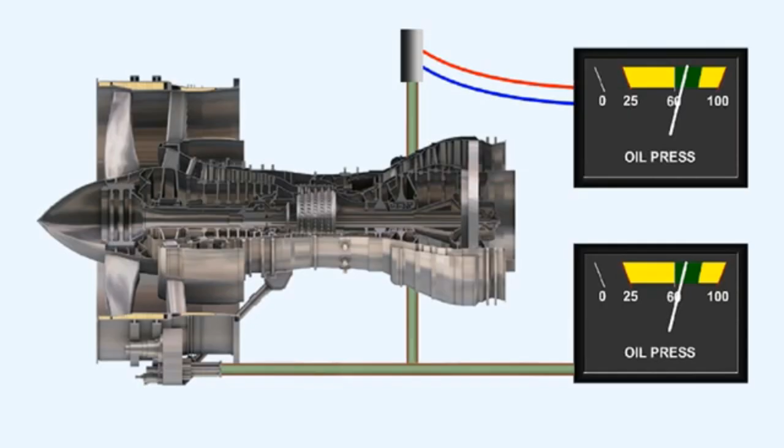A remote indicating system uses a remotely positioned sensing element which is connected to the pressure source. The sensing element translates the actual pressure reading into an electrical signal, then sends the signal via electrical wiring from its remote position to an instrument in the cockpit.

A direct reading pressure instrument is physically connected to the source of the pressure that it's sensing. For instance, a direct reading engine oil pressure gauge will be connected via an oil pressure pipeline directly to the engine, to the point where the oil pressure is to be measured.

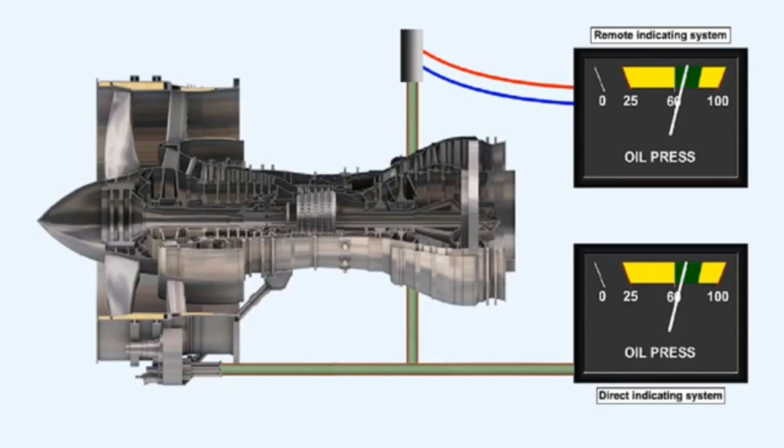Coloured arcs of green, amber or red are used to indicate the range and limits of the pressure system.

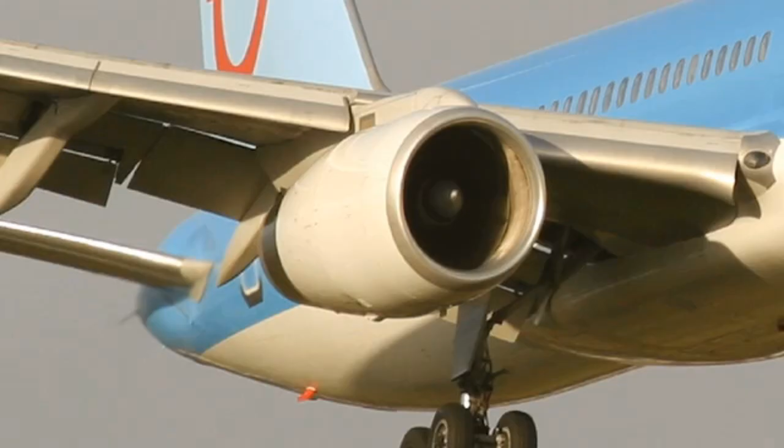Vibration monitoring equipment is fitted to almost all commercial jet engine aircraft. Although gas turbine engines have an extremely low vibration level, any change in that level is usually indicative of damage which may lead to failure.

Warnings will be given in the cockpit if the vibration levels are exceeded, and some systems have a continuous readout of vibration levels.

Modern engines have the facility whereby the vibration level of each rotating assembly can be monitored, so that the source of any vibration can be pinpointed.

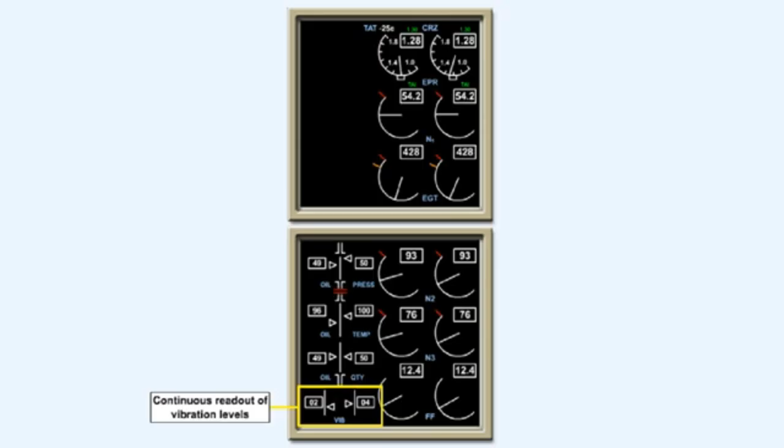The principle upon which vibration monitoring equipment works requires an input from a detector, which can be either a piezoelectrical crystal mounted strategically on the engine, or a fixed coil carrying 115 volts at 400 Hz, the output of which will be affected by the movement of a magnet within it, which is mounted on springs.

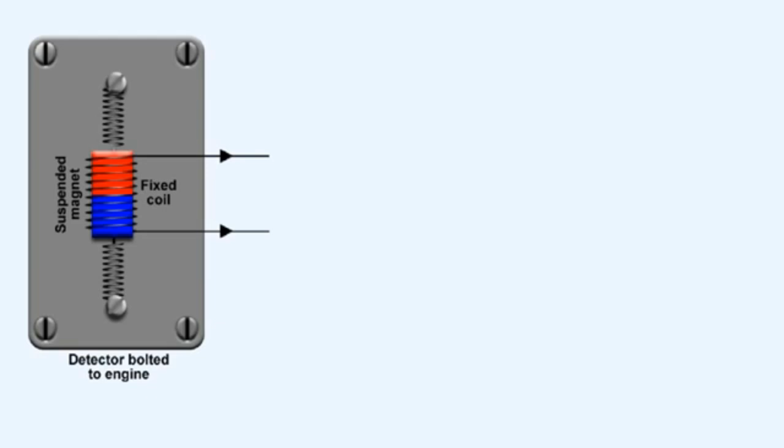In either case, the frequency of the incoming vibrations will be amplified, and then filtered so that only those frequencies that are indicative of damage occurring to the engine will affect the output.

The output of the detector will affect the current flowing through the coil into the amplifier and filter. The filter will erase any output which is normal to the engine, but allow through to the amplifier any frequency that's considered to be harmful to the engine.

The result of this amplification is sent to the instrument via the rectifier and warning circuit. The needle will show the appropriate deflection for the amount of vibration being suffered by the engine at that time.

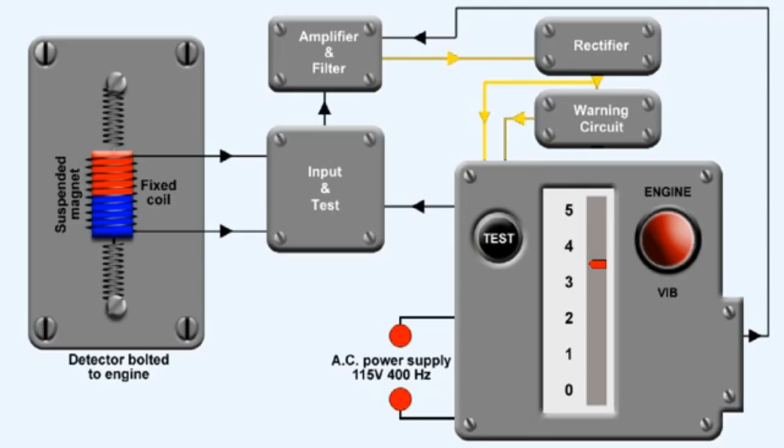If the level of vibration exceeds a predetermined amount, a warning light on the instrument illuminates. Vibration is measured and displayed in relative amplitude.

There are two methods of indicating the quantity of fuel carried in an aircraft. Either the volume, for example gallons, or the mass, kilograms or pounds, are measured.

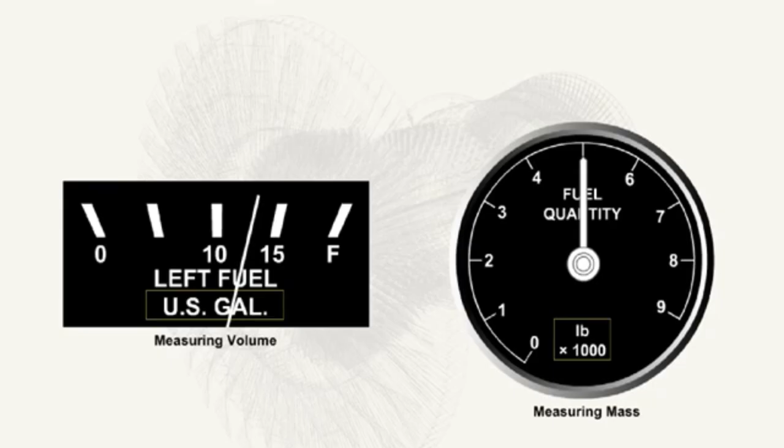Because the mass of the fuel on board is of more interest to the pilot of a large aircraft than is the volume of the fuel on board, measurement of the volume of fuel is now only used on light aircraft.

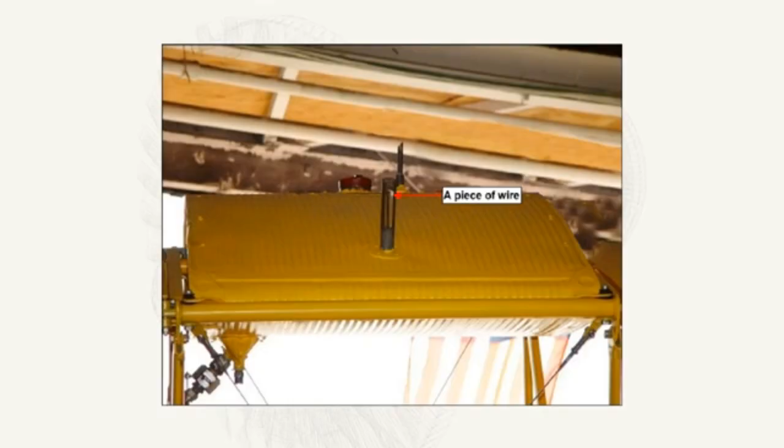The simplest form of volume indication is a float system. Early aircraft used a float which sat on the surface of the fuel in the tank. Attached to the float was a piece of wire that protruded out of the top of the fuel tank. As the fuel level reduced, so the wire disappeared from view.

A later system used the float to reposition a wiper on a variable resistor. This varied the current flowing to an indicator which had a pointer that moved over a scale calibrated in volume. The system was powered by direct current.

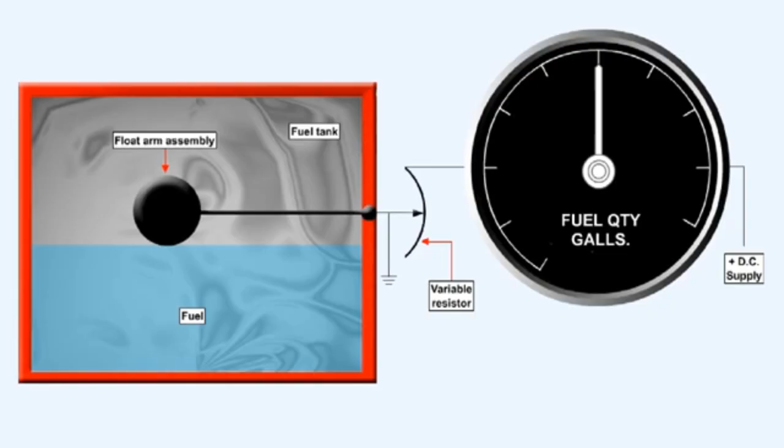The disadvantage of the float system is that the indication is not linear, and there is no provision for making adjustments for system accuracy. The gauge is set to be accurate at the low and empty positions.

The system is also subject to errors caused by temperature changes, aircraft attitude changes, and aircraft acceleration.

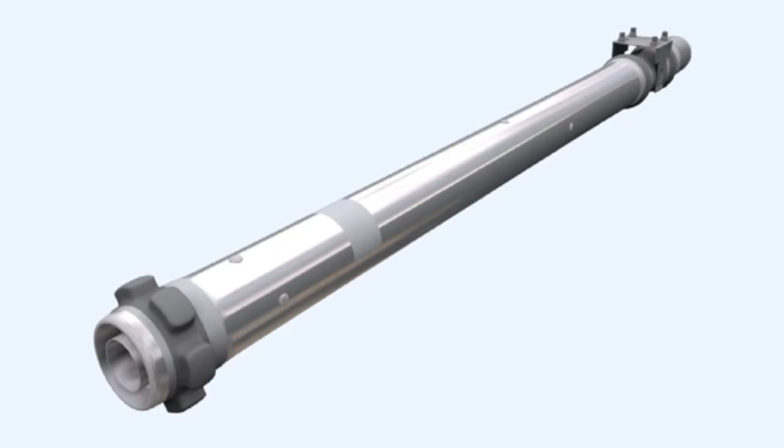In its basic form, a capacitance system, which is much more accurate than the float system, consists of a tank unit, which is effectively a variable capacitor, located in the fuel tank, together with an amplifier and an indicator.

A tank unit consists of two concentric aluminium alloyed tubes which are held apart by pairs of insulating pins. The coaxial electrical connections are insulated and the unit is insulated from the tank.

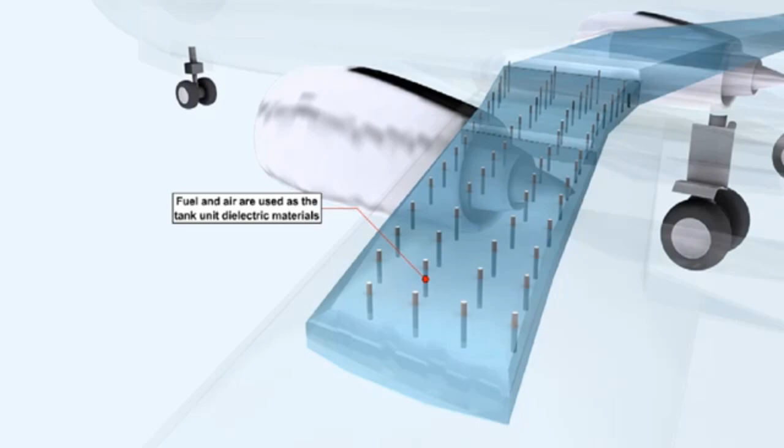The principle of operation of the capacitance system is based on the use of fuel and air as the dielectric between parallel plate capacitors, which have a fixed area and a fixed distance between them. The only variable in the system is the ratio of the dielectrics used, fuel and air. That ratio is determined by the quantity of fuel in the tank.

Incorporated in the system are reference units, which reduce indication errors that would occur if the dielectric constant of the fuel changes from its normal value, which is about twice that of air, and directly proportional to its density.

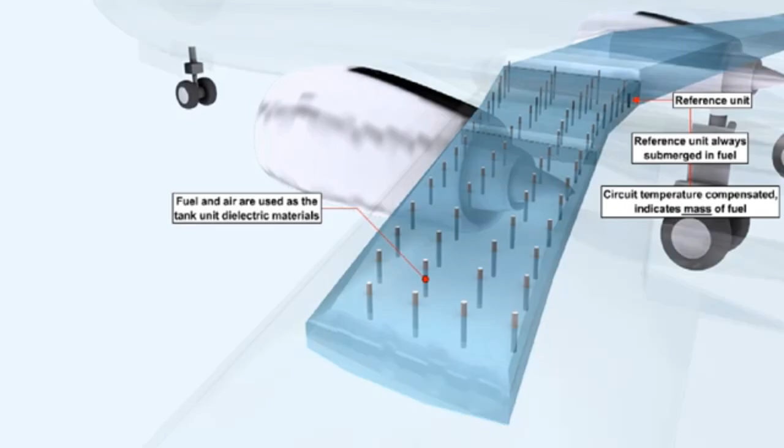Reference units are located on the lower end of a tank unit, and are always totally submerged in the unusable fuel that remains in the tank. The circuit is compensated for changes in temperature, and will indicate the mass of the fuel in the tanks.

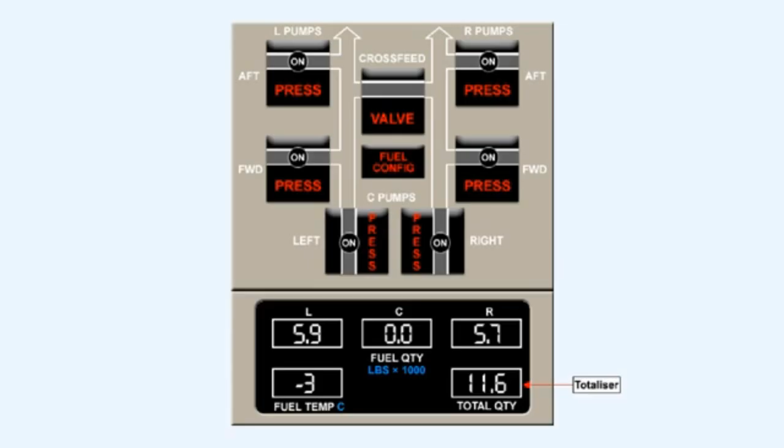Fuel gauging systems can incorporate an additional indicator known as the fuel totalizer, which can indicate the sum of all the tank quantities.

In the event of a gauge failure, the fuel gauging system will fail safe and drive the needle of the failed indicator slowly to the zero position.

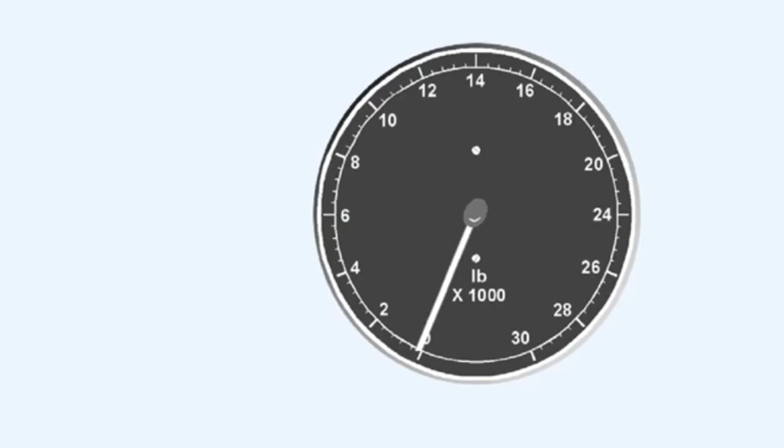A test circuit is incorporated which will simulate gauge failure. Place your cursor over the test button to activate the test. When the test switch is released, the pointer should return to its original position.

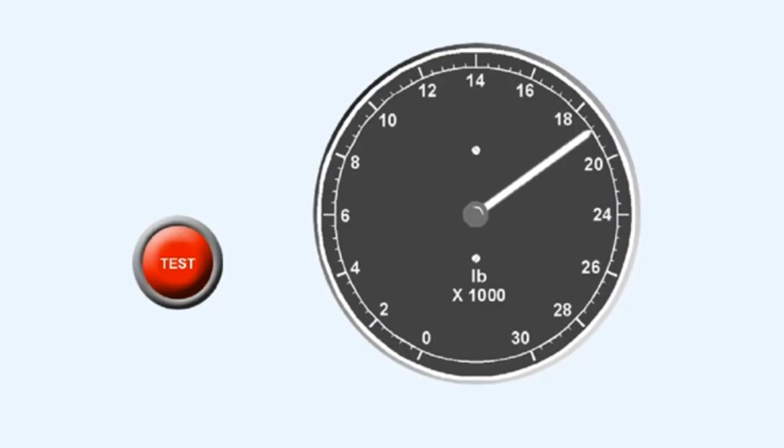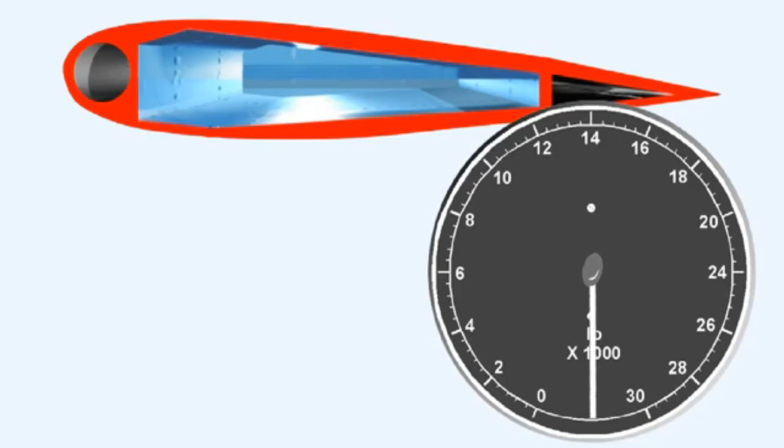If water is present in the fuel, it can cause errors in the indicating system. If the percentage of water is very large, the capacitors in the sensing units can be effectively shorted out. If this happens, the indicator needle will be driven beyond full scale.

As well as the quantity of fuel measured, the instantaneous fuel flow can be shown. To obtain the indication of total fuel used, the instantaneous fuel flow must be integrated.

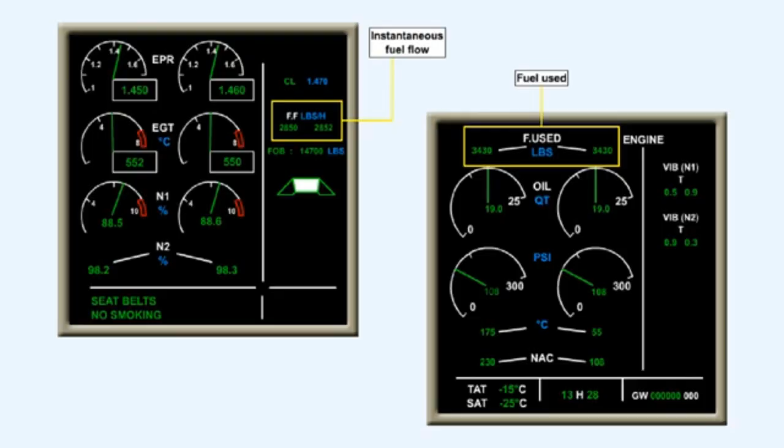The fuel flow meter can display either volume flow or mass flow. To indicate mass flow, the meter must be compensated for the density of the fuel.

A fuel pressure gauge can be adapted to be used as a simple flow meter. This system is used on many light piston engine injection systems.

Most gas turbine engines use an electrical sensor, which utilizes the change in either the torque output or the rotational speed of an impeller situated in the high-pressure fuel line to the fuel spray nozzles.

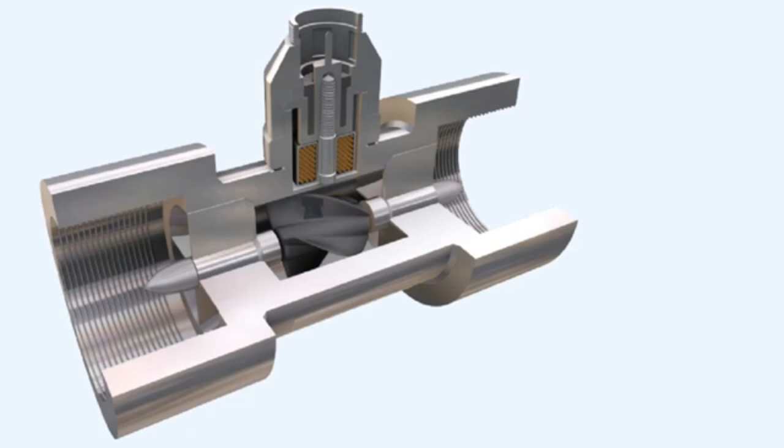This type of fuel flow meter consists of a cylindrical light alloy casting, within which are guide vanes that support the shaft of a helical vane impeller. The impeller has a magnet embedded in it.

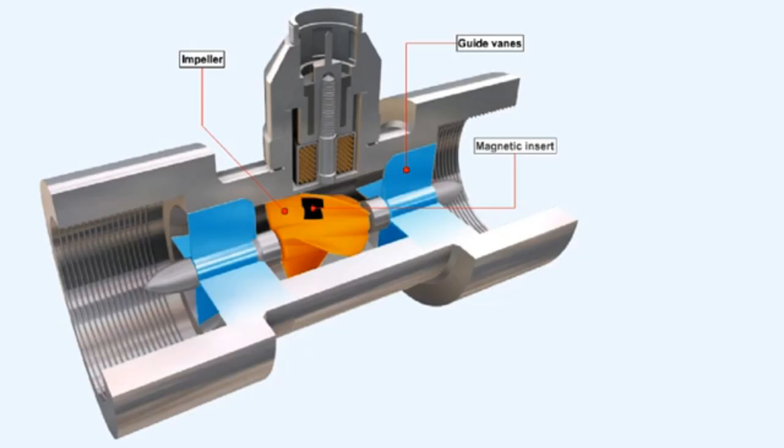Electrical pick-off coils are situated in the wall of the cylinder casting. When the fuel flow rotates the impeller, a sinusoidal signal is induced in the pick-off coils.

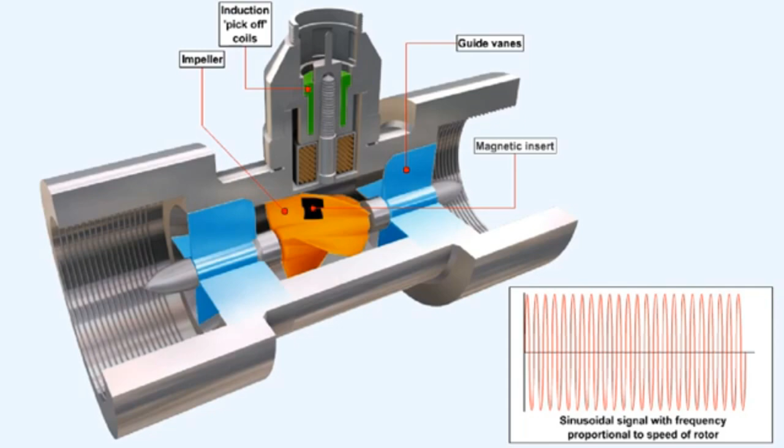The frequency of the sinusoidal signal is proportional to the speed of the rotor, which in turn is proportional to the rate of flow.

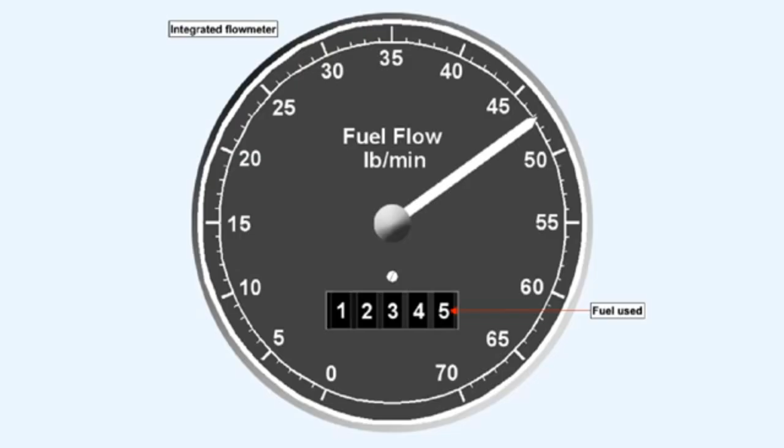The total consumption is obtained by integrating the rate of fuel consumption over time. A flow meter that displays fuel consumed as well as fuel flow is called an integrated flow meter.

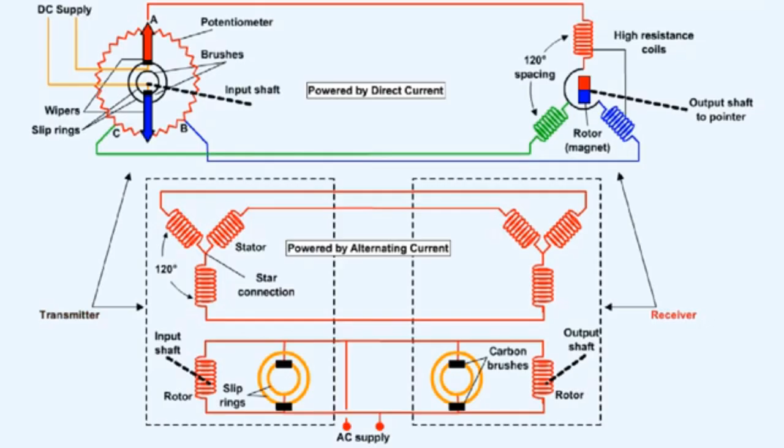Modern aircraft employ remote indicating systems that can be powered by either direct current or alternating current supplies. Whatever the power source, each data transmission system employs a remotely positioned transmitter located at the source of the information, and a receiver which responds to the information received.

The Desynn transmission system is a simple transmission system with low torque characteristics, used for the remote indication of angular position. It's often used where a simple pointer and scale is adequate, for example remote indication of flap, rudder and elevator positions, or to repeat the reading of an instrument at a remote point.

The accuracy of the system is approximately plus or minus 2%.

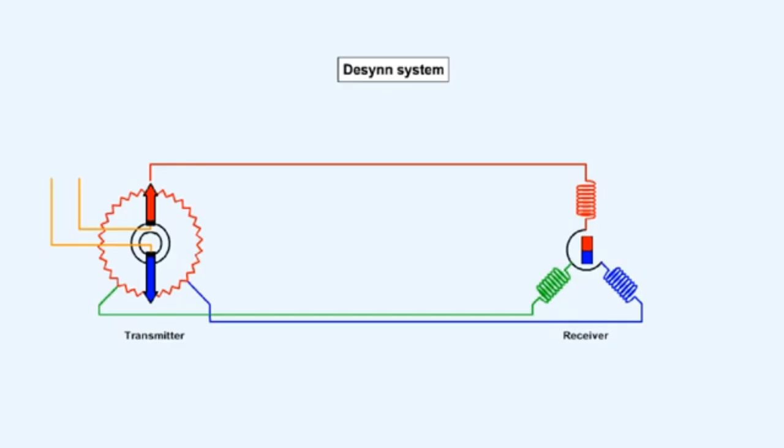The transmitter consists of a continuous resistance ring or potentiometer which has three fixed tappings, A, B and C, spaced 120 degrees apart, which are connected to the receiver. The input shaft carries two diametrically opposed spring-loaded sliding contacts, or wipers, which are in contact with the potentiometer.

The input shaft carries two diametrically opposed spring-loaded sliding contacts, or wipers, which are in contact with the potentiometer. The wipers are fed via slip rings and brushes with direct current.

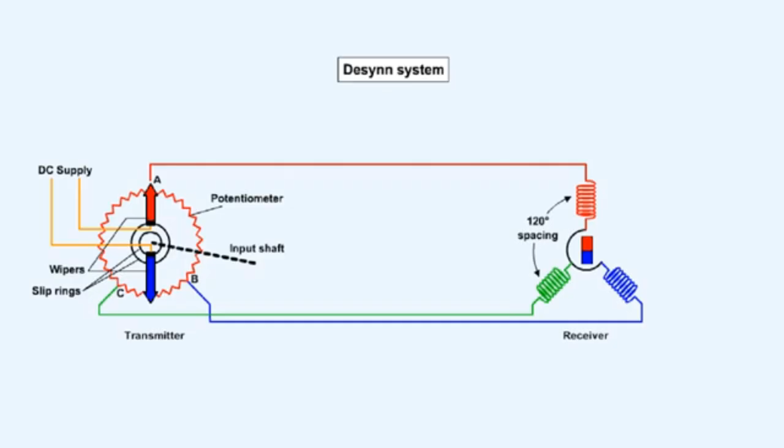The receiver consists of three high-resistance coils, whose axes are spaced 120 degrees apart, with a permanent magnet rotor pivoted at their center, carrying a pointer shaft. The three coils are connected to the tapping points A, B and C in the transmitter.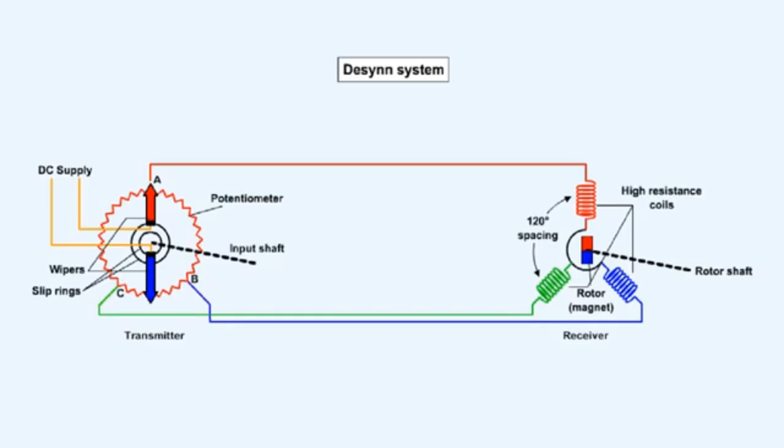When direct current is applied to the transmitter wipers, the voltages at tapping points A, B and C produce a current flow in the three stators of the receiver, and a resultant magnetic field is produced. The rotor magnet aligns itself with this magnetic field.

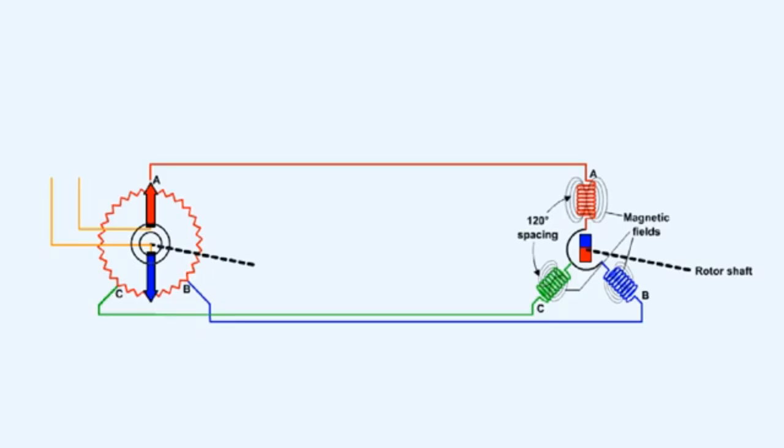The magnitude and polarity of each tapping point voltage varies according to the position of the wipers, and thus, if the input shaft is rotated, the change of voltages at A, B and C produces a variation in the current flowing in the stator coils, and rotation of the resultant magnetic field in sympathy with the rotation of the input shaft. The rotor magnet remains aligned with this field at all times, and so rotates in synchronism with the input shaft.

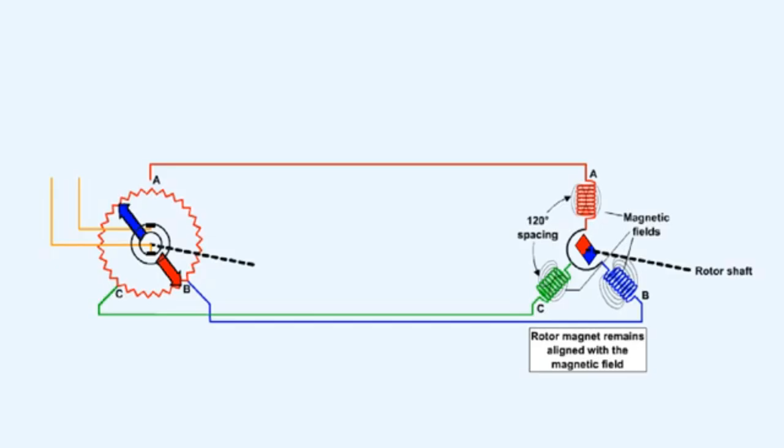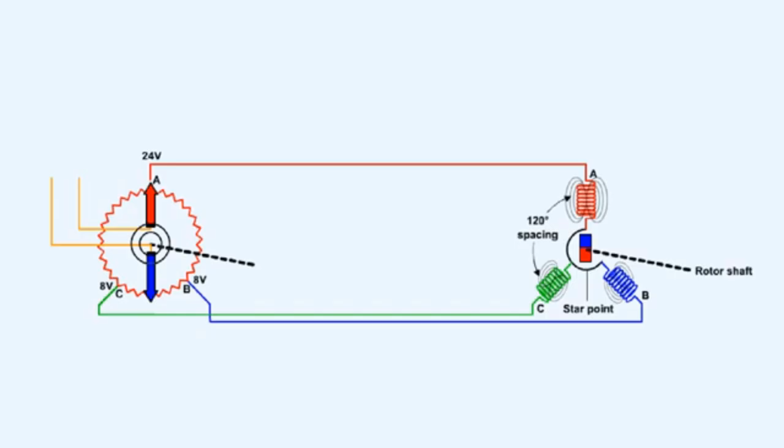Here the voltage distribution around the potentiometer is such that point A is at plus 24 volts, while points B and C are both at plus 8 volts. Because the voltage at A differs from that at B and C by the same amount, current flows from A through coil A in the receiver, then divides equally at the star point, with half the total current flowing through coil B and half through coil C back to the transmitter. The resultant magnetic field in the receiver, with which the rotor magnet aligns itself, is compounded from the vectors representing the individual fields.

If the input shaft is rotated through 120 degrees in a clockwise direction, as shown here, the voltage distribution around the potentiometer is such that current flows from B through coil B in the receiver, then divides equally to flow through coils A and C back to the transmitter. The vectors show that the resultant magnetic field also rotates through 120 degrees clockwise, and the rotor shaft aligns itself along this new axis.

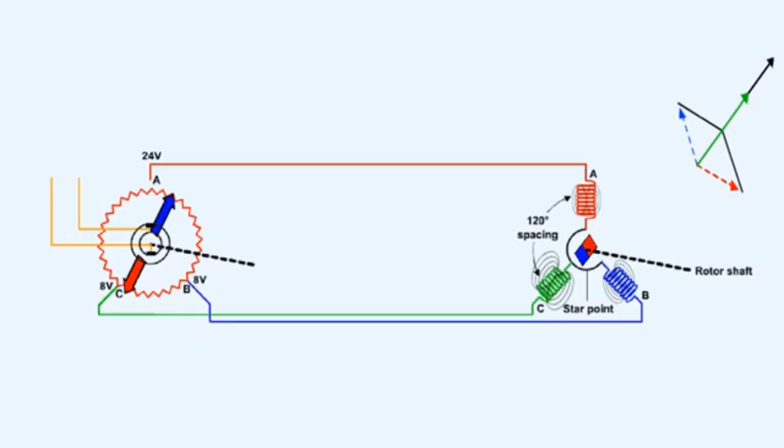Thus, if the wipers in the transmitter are placed in any position by the input shaft, the resultant field at the receiver, and hence the rotor magnet, takes up a corresponding position. If a pointer moving over a calibrated scale is attached to the rotor, remote indication of the position of the input shaft is immediately available.

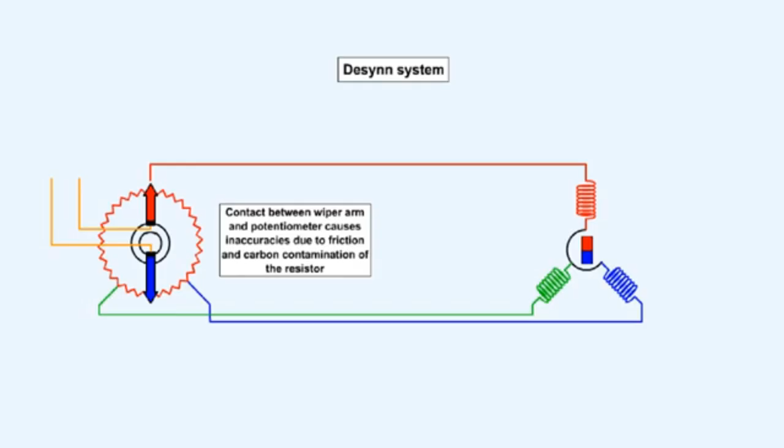The Desynn system has inherent errors caused by the wiper arm being in physical contact with the potentiometer. This causes inaccuracies due to friction and carbon contamination of the resistor.

The Selsyn was developed in 1925. Halfway through the Second World War, the Americans reinvented the Selsyn and called it the Synchro. The Selsyn is a system whereby a transmitter and a receiver, powered by alternating current, are electrically connected so that angular rotation of the rotor in the transmitter is reproduced simultaneously in the receiver.

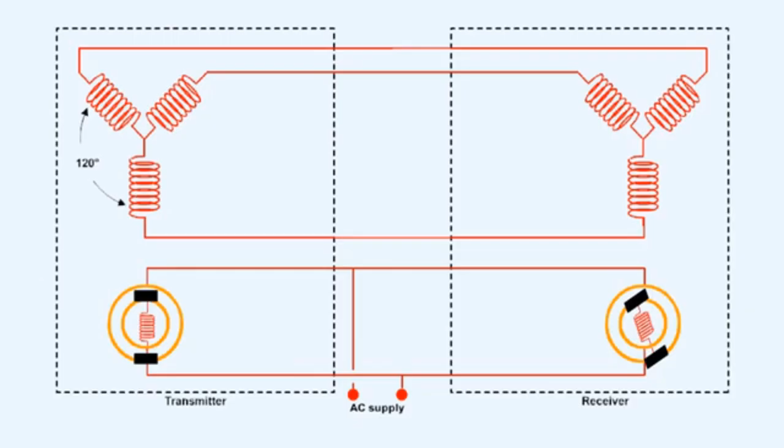The transmitter consists of a stator and a rotor. The stator has three electrical coils whose axes are 120 degrees apart. The three stator coils are star-connected. The rotor is mounted on a shaft and has one electrical winding, the two ends of which terminate in two slip rings. Carbon brushes feed power to the rotor through the two slip rings.

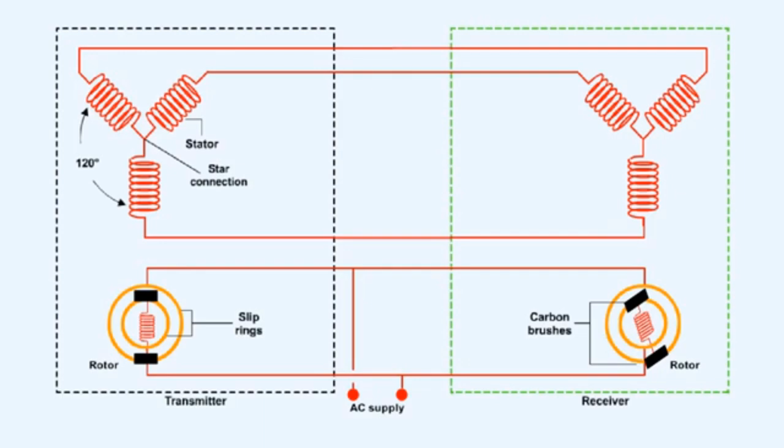The receiver is identical to the transmitter, and they are connected electrically to each other as shown here. The two rotors are supplied by alternating current from the same source. With power applied, both of the rotors will adopt the same position relative to their stators. The rotor of the transmitter can be attached to the output shaft of any device which needs positional information communicated to a remote position.

The magnetic flux generated in the coil of the rotor interacts with the cores of the stator and causes a current to flow in their windings. Because the stator coils of the transmitter and receiver are in series with each other, the stator coils of the receiver now have a magnetic field around them which is identical to that around the stator coils in the transmitter. The rotor in the receiver aligns itself with the magnetic field which is formed in the receiver stator, adopting a position which is identical to that of the transmitter rotor.

The synchro system is more accurate than the Desynn system.

Some aircraft indicate and record usage of their engines in flight. The flight hour meter can be coupled to an airborne sensor which energizes it at certain airspeeds. The information obtained from the flight hour meter can be used to determine the time to run between engine servicing periods.